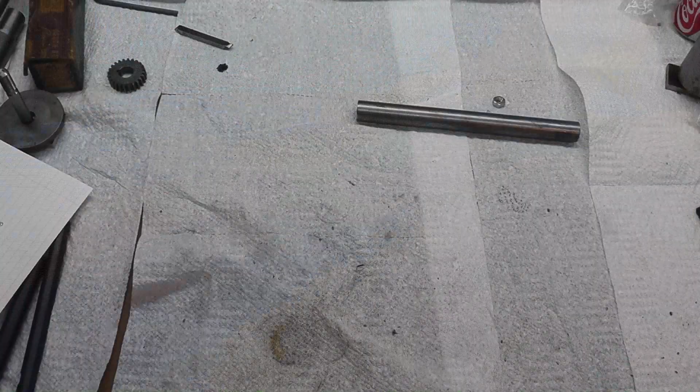Now that we got outside all cleaned up, we can get on to our project. Our project is going to be a tailstock tap and die holder, and this video is going to concentrate on just machining this Morse taper.

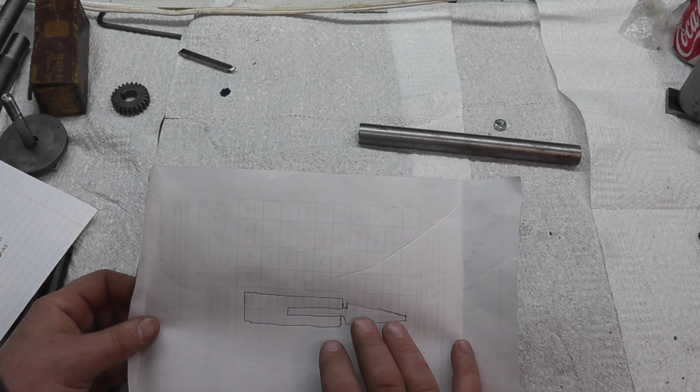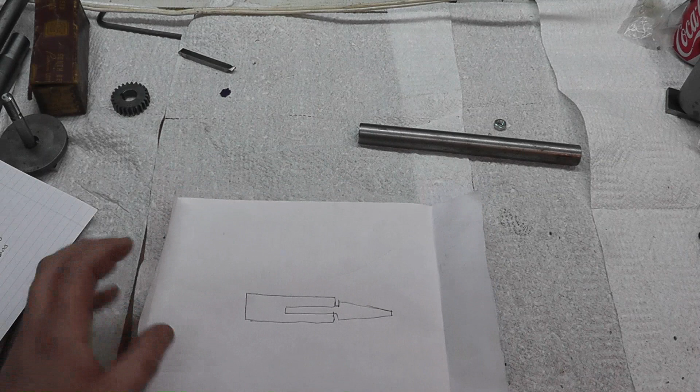I wanted to do a Morse tapered shank on the holder because, one, it's more fun to machine rather than doing just a straight shank, and two, if you have this in your tailstock, I'm going to make this comfortable enough to hold with your hand. I didn't want to have this huge piece of metal sticking out, and then also your drill chuck, and just have this huge long contraption.

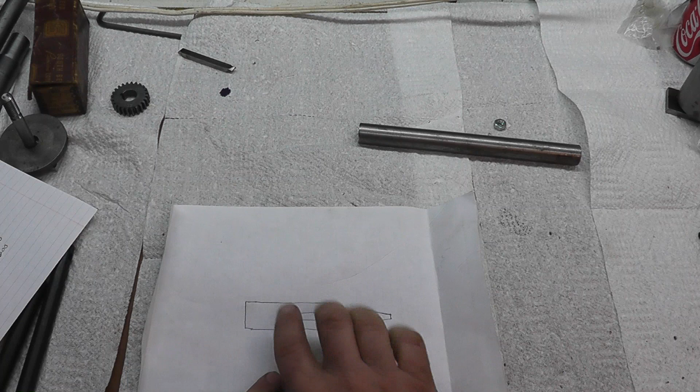The basic premise is the Morse taper is going to be in your tailstock. You'll have a rod, which I haven't figured out the length yet, and then you'll have a body. The body sits on the rod and will be allowed to spin. Up front you'll have a device to hold the dies, and also I'm going to incorporate some sort of tap holder to it too, which I haven't figured out yet.

You'll grab it with your hand as the lathe is running at a slow speed, and you'll be able to, with hand pressure, stop this shaft from turning, and it'll tap and feed itself. And then when you hear or feel it hit the shoulder, you can let go and it'll spin on the shaft without feeding itself in.

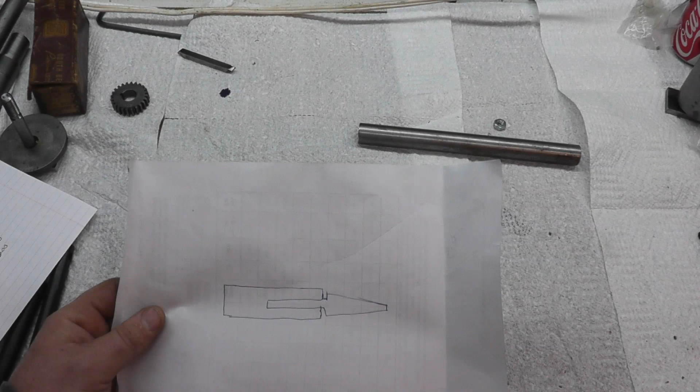For the heavier cuts, I'm going to put a bar that you'll be able to hold too, or rest against the ways. Those are in upcoming videos, but basically we're going to concentrate on this Morse taper, so that way people that don't want to build the whole project can see how to do the Morse taper with the tailstock offset.

By all means, if you have a taper attachment, use it. If your compound is long enough to accommodate a Morse taper, use your compound. It's a lot easier, but my compound does not have enough travel to be able to cut the Morse taper.

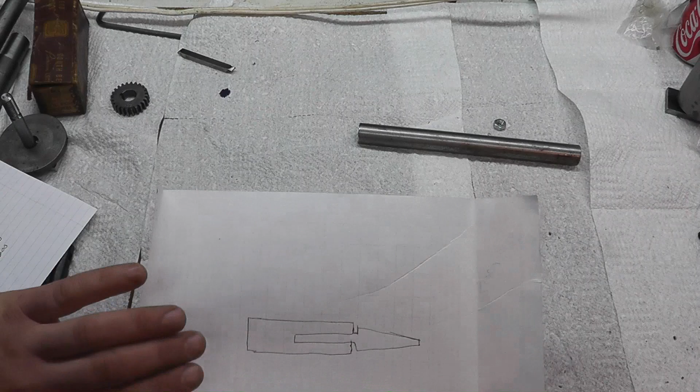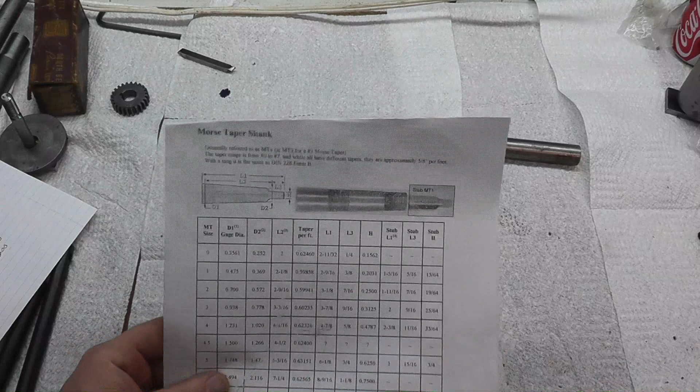The Morse taper, the actual tapered part that fits into the tailstock itself, is, mine's a number 2, 2-9/16 right there. These charts you can get on the internet. It gives you basically the large diameter on this end and the small diameter on this end.

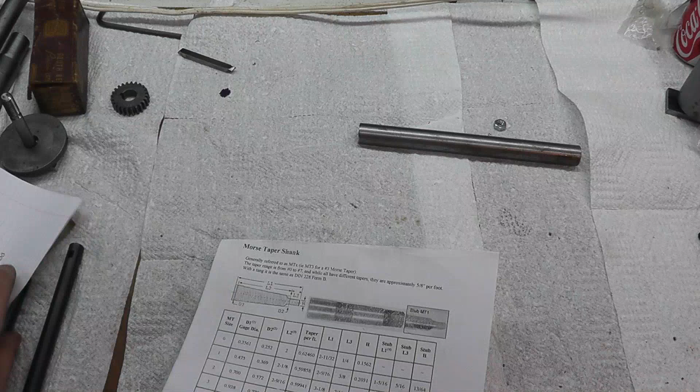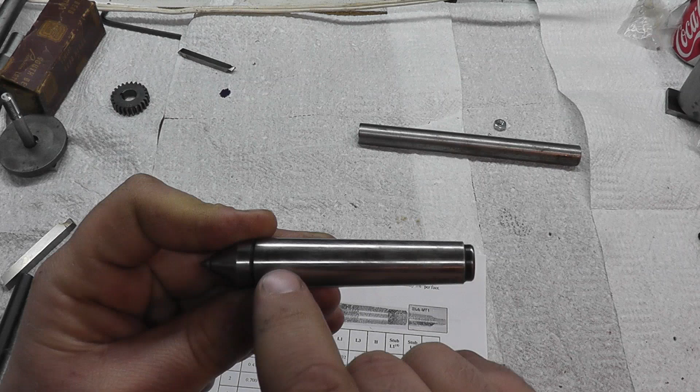This taper is longer than 2 and 9/16. The reason for that is you have to have the point sticking out, so basically the only part that sits into the tapered quill is up to about here. Now if you measure right where the quill ends and this end, you'll get your 700 thousandths here and your 572 thousandths here. These are standards - all Morse tapers are, depending on size obviously, but all Morse tapers are standard.

We're obviously going to be machining this between centers, so we're going to have to figure out how much we want to offset our tailstock.

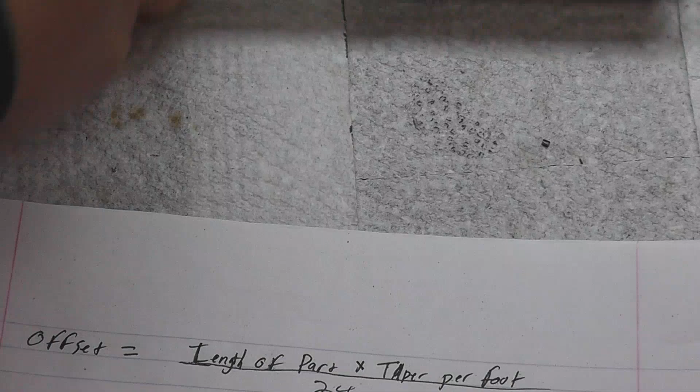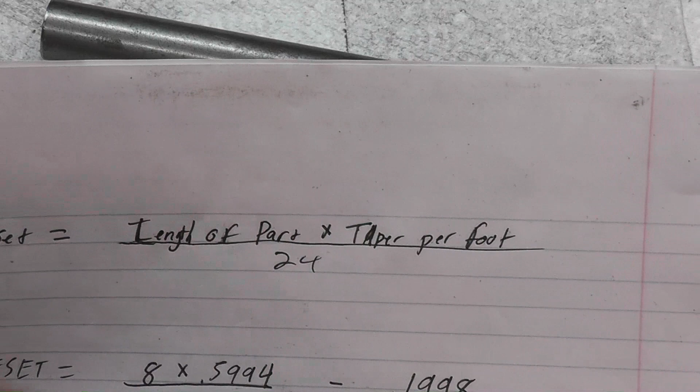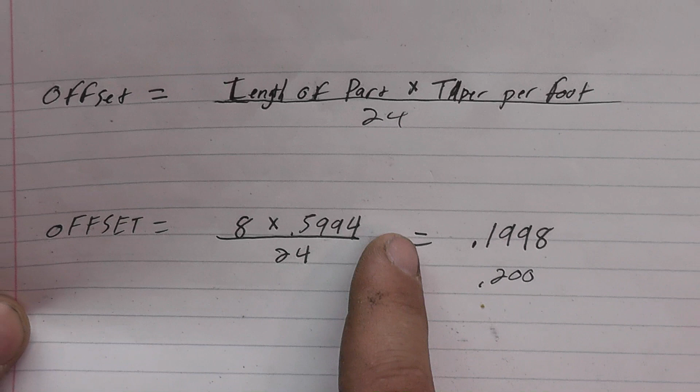Now we do have a formula for our tailstock offset, because I know you guys love formulas so much. Your amount of tailstock offset is equal to the length of the part - not the length of taper, the actual length of the piece you're cutting, which in my case is 8 inches long - multiplied by your taper per foot, which you can find in your chart, divided by 24. So our amount of offset equals 8 times 0.5994, which is our taper per foot, divided by 24, equals 0.1998, which is pretty close to 200 thousandths, so we're going to call it that.

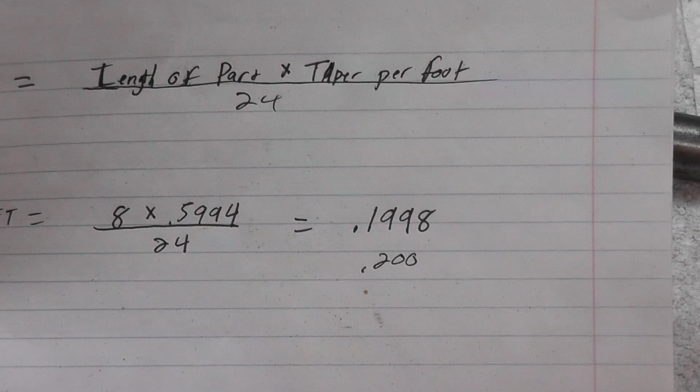Now, I do have enough travel in the tailstock to offset 200 thousandths. Now, here's the thing.

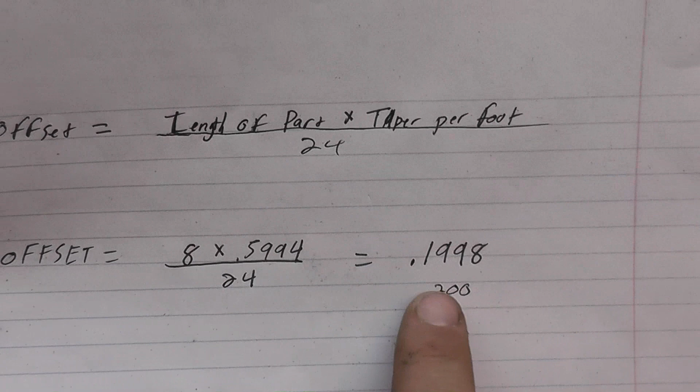You would think that the longer the part, the smaller the tailstock offset. But that's not true. It's actually the smaller the part, the smaller your tailstock offset.

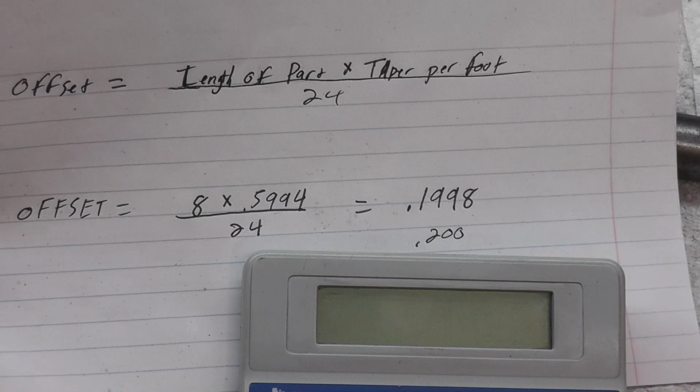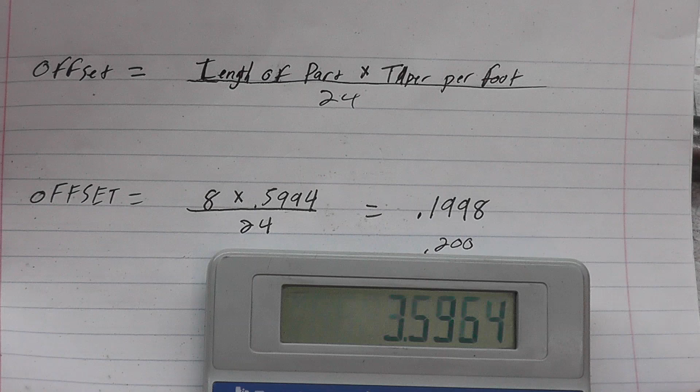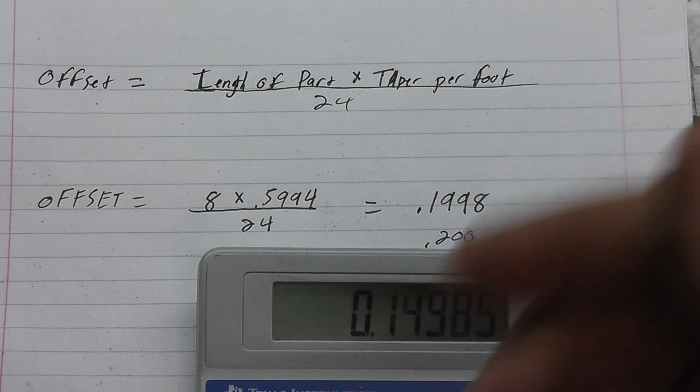So let's, just for S and G's here, put in 6. We have a 6-inch piece times 0.5994 divided by 24. We would only have to offset our tailstock 150 thousandths with a 6-inch piece. So you can kind of see how that works and measure your piece out by the amount that you're able to offset your tailstock.

I'm using 8 inches because I'm going to be able to do the taper and then have that shank rod all in one piece. Also, this is a piece of 3/4 inch that is center drilled and faced on both ends, because our large diameter on our Morse 2 taper is 700 thousandths, so that'll give us plenty of meat to go.

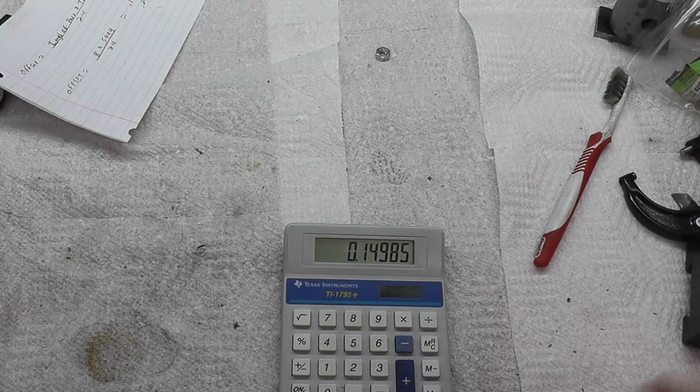Now, as far as running on centers goes, you've seen in my other videos you've seen me do it, but I just want to show you a quick thing.

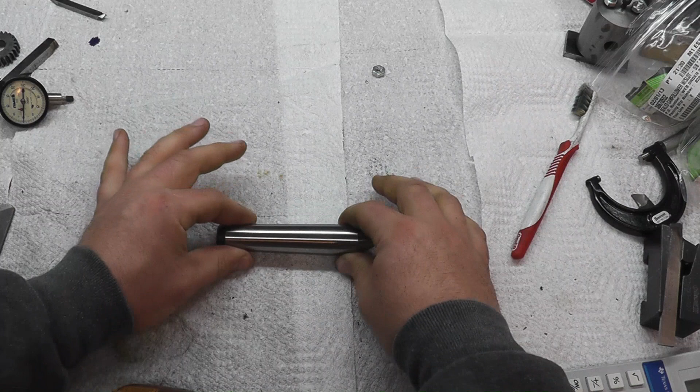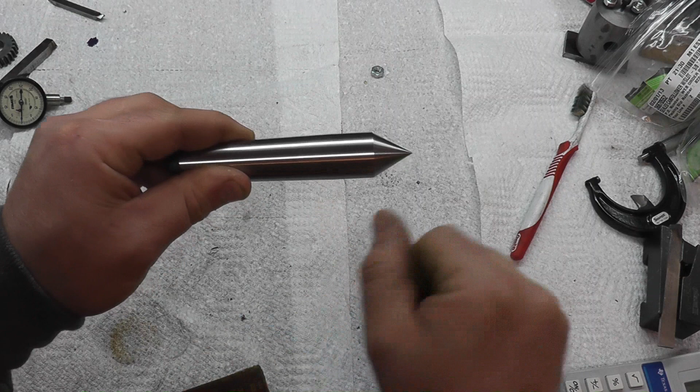This is your Morse 3 dead center that'll go on your headstock. And you've seen in my other videos, you can actually see a little line right here. Probably doesn't show up on camera, but that's where the spindle taper ends. This much of this sticks out of the spindle.

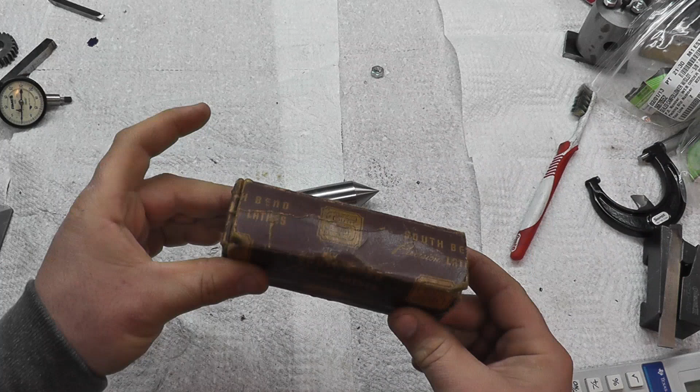Now here is, and it's actually an original South Bend part, very old. As you see, it's in metal clad boxes, metal edges. But here is a Morse Taper 3 spindle sleeve with a Morse 2 dead center inside of it.

Now I'm assuming this looks like 2 pieces, but I tried pressing this out and I can't get it out, so I don't know how pressed that is in there, if it's bonded or whatever, but either way, you can see the size difference. So you gain about a 1/2 inch or so on your length towards your headstock, which will give you more of a positive engagement for your lathe dog. Just something to be aware of.

So let me go over to the lathe and we're going to set up our tailstock offset, and we're going to use that test bar that I've machined a few videos back. If you need to know how to make one of these, it's very, very simple. I do have a video of it, but it's basically face both ends, center drill both ends, run it between centers, and true up one end of it.

That's the basic idea of it. So let me put this in the lathe and get a dial indicator set up on it so we can offset.

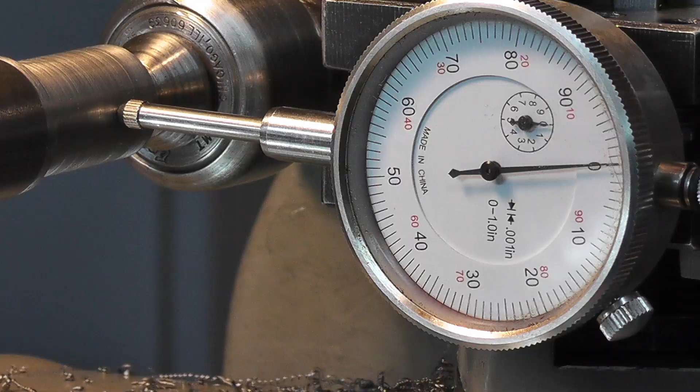Okay, I have my test bar mounted between centers. Now before I did this, I went and used this test bar and that twin collar one that I made to make sure that my tailstock was in alignment, and so we got that all set.

I did have to add, to get the, I have enough room for the 200 thousandths, but the little set screw on the base of the tailstock was too short to give me the 200 thousandths, so I had to put in a longer one.

So I want to offset this 200 thousandths. Now it doesn't matter the length of your bar. 200 thousandths offset is 200 thousandths offset, whether it's 12 inches away or 6 inches away. The only reason why that comes into play is because the amount of angle that you have when you're closer or farther away.

So I loosened up the other side, the other set screw on the other side, and we're going to pull this tailstock towards us to make the end of the bar smaller, and towards the headstock is going to be the larger side of our taper.

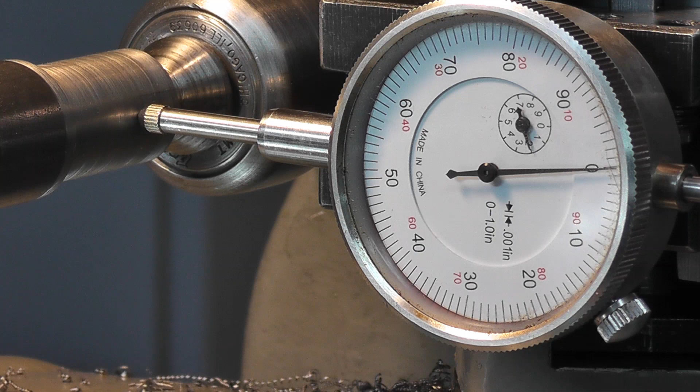Make sure it doesn't pull that tailstock any. Let me set up the bar between centers and get you a better angle.

Alright, I got you the best overhead view I can get so you can see the taper being cut really well. I'm going to be turning at a relatively slow speed because I have the drive dog hanging out here, which is going to cause an imbalance. I just don't want a lot of vibration in the part. Let's get going on cutting this. The one thing you want to make sure of is that you have enough clearance on your tool to your part, because your part is tilted towards you, so you want to make sure you're actually cutting and not rubbing, so just adjust your tool post accordingly.

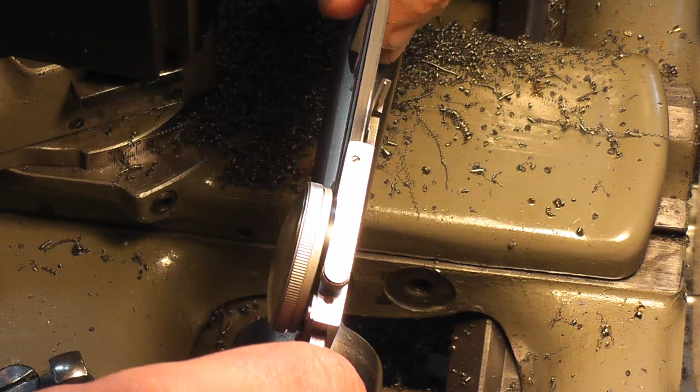I know the camera probably can't pick up on that, but this mark right here is where I want my 700 thousandths diameter. This isn't going to be extremely accurate because I'm just using the dial calipers. Let me get in here best I can. It's about 5 thousandths off, and we want 572 at the end, the very end.

575. So I'm going to take another quick pass, take a couple of thousandths off. And then that should be it. Then the rest of the fit I can kind of draw file out.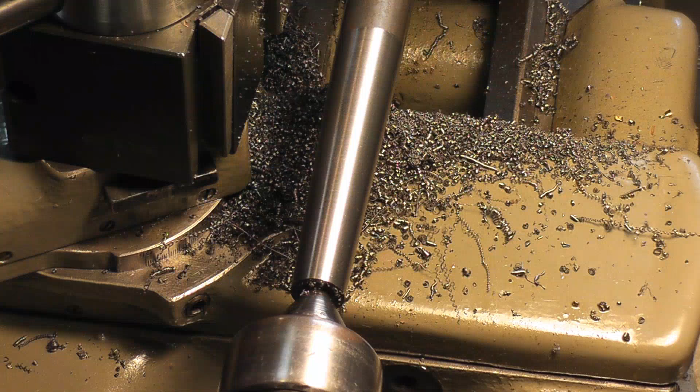Let me grab this. I'm just going to give this a quick polish, get rid of those tooling marks. Quick polish here.

Now what I want to do, or try to do, is take that one, hold them opposite of each other, and see if they equal on both sides here.

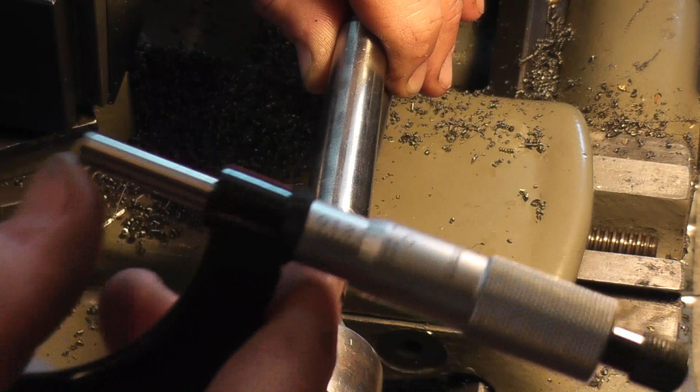I don't know if I can. Right here, I'm measuring. Let's see. On the bottom there, and then this. I don't know if you can tell, the camera will focus there. It says 322 thousandths, but, or 1 inch 322.

I'm sorry. Yeah, 1 inch 322. And right there, we're at 23. So we're within a thousandth of whatever this is there.

Now, what I want to do is let me take the camera down. I'm going to blue this, and we're going to check it against our actual, before I do that, what we're going to do is just take the very end, touch off. I'm going to take about 25 thousandths, and we're just going to cut a relief at the very, very end. Maybe just a little bit more. Take another 20.

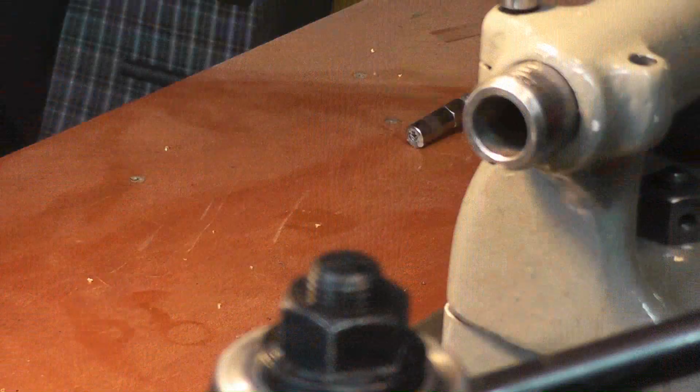Alright, now let me get a better angle for you, and we're going to test our taper. Alright, time to test fit our taper. Now, I still have it in the lathe dog in case we got to put it back in. I have bluing on it.

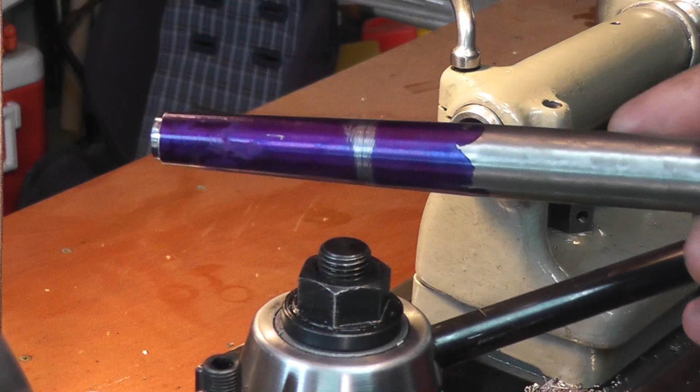So crank out the tailstock a little bit. Seat it. Give it a quick little twist. Back it off and see if it self-ejects. Which it barely does. Alright, you can see right here, we're hitting hard right at the top. It means I have to take a little bit more off to be able to get this whole thing to seat.

So we're so close that what I'm going to do is just hand draw file it until I get this to seat perfectly. I'll take a little bit here and then retry it again, and then just keep going back and forth. So rather than put you through all that, I'll show you the last couple of steps and what we end up with.

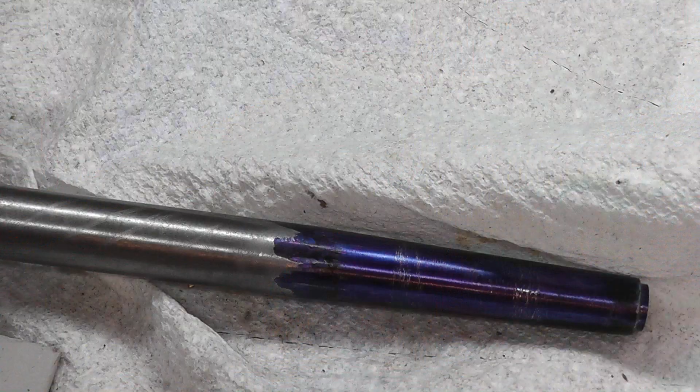Alright, after some filing and back and forth, we got ourselves a nice fit. I don't know if you can see here, but we're hitting here, we got some hits here, we're hitting here, and spots in between, all along here. Basically we have one ring from here to here, one ring on the very tip, that's about a quarter of an inch wide, and then you got a little line here and some hit here.

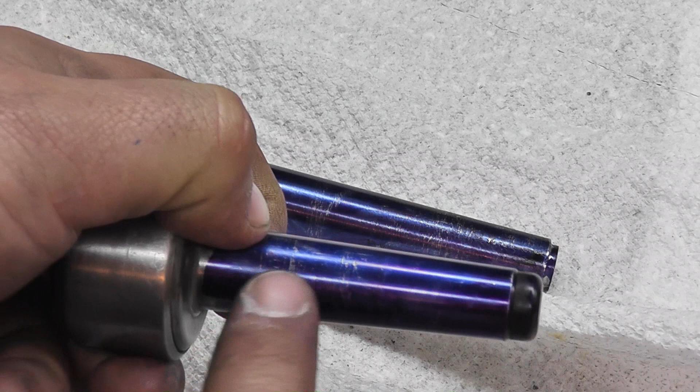Now I just compared that to the live center, and you can see that we're hitting hard around the edge. We're hitting right here and here, so it's actually better than the center I've been using. So, let me just swing over to the lathe itself.

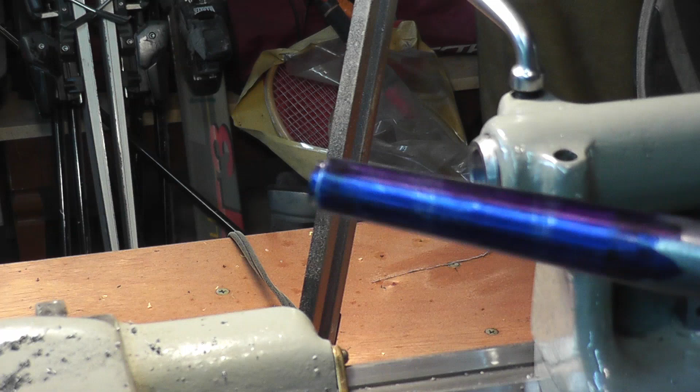When you put it in and seat it, it does not rotate, and it will self-eject. So that's pretty much going to be the basis for our part, and I'm going to turn the rest of this down to the diameter that we need.

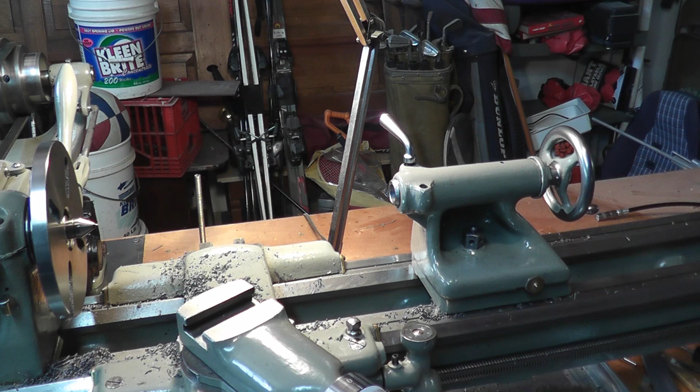So right now, let me get this tailstock back in line to where we need it. Now we want to get our tailstock back to center line, so my dial indicator here is touching up against the turned side of that test bar. I'm going to crank in.

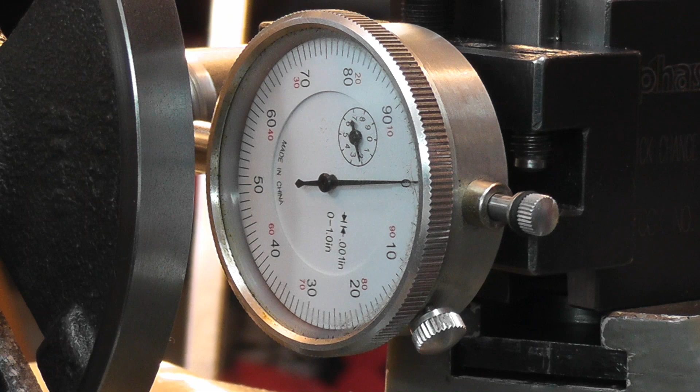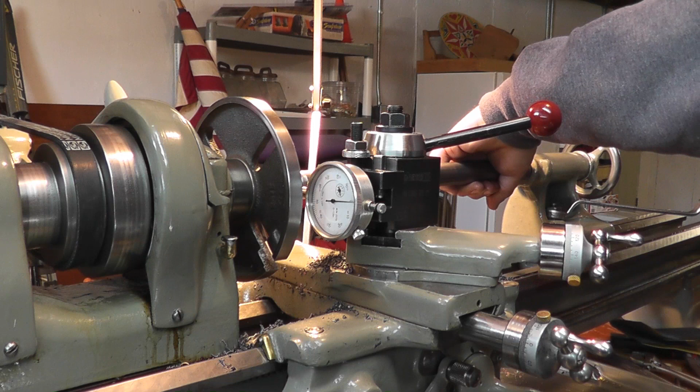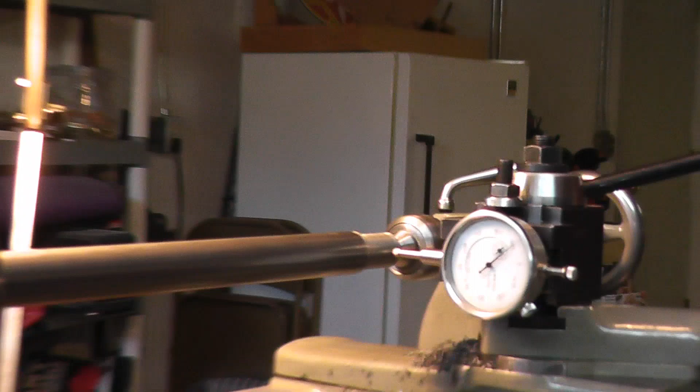There's 0, 100 thousandths, 200 thousandths. So we're going to bring our bar out of here, crank our carriage down to the other side. A little bit further, just to get the carriage all the way down, to the same spot on that bar, or same distance away from the center. Now we move our tailstock away from us 200 thousandths.

Is 100. And there's 200. Now we're going to double check that, but I want to put a little bit more of a sensitive indicator in there. So let me just change that out real quick.

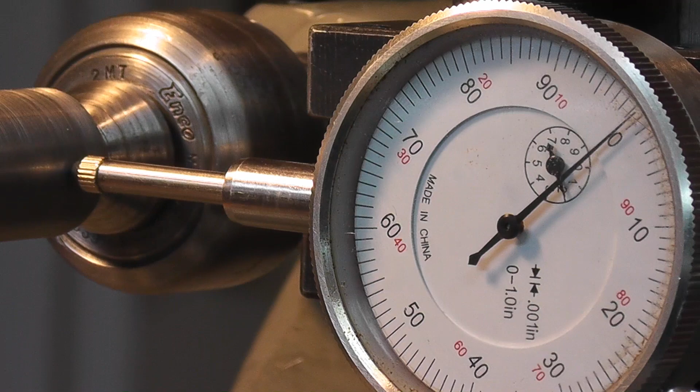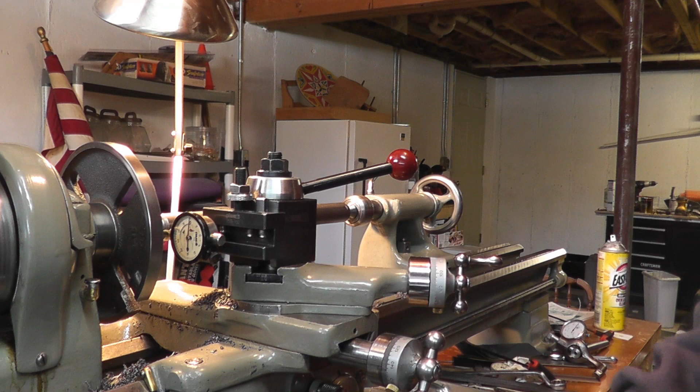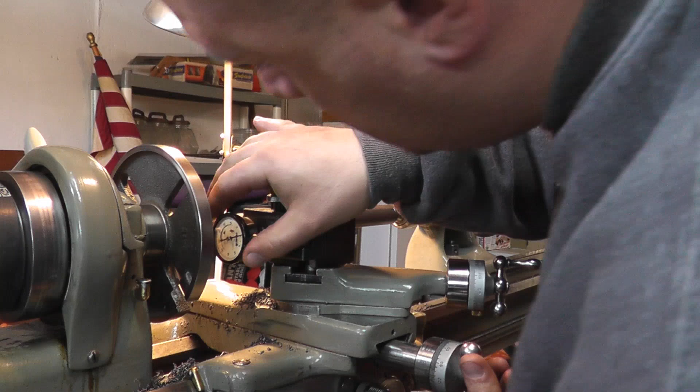I have my more sensitive indicator on here, and I have my bar back in place. Whenever you do this, just make sure you lock the quill down, because that'll tend to skew your readings a little bit. So we're going to bring this in here, and I know you probably can't see it, so I'm going to try to zoom into it, but I'm just going to load it about 5 or 10 thousandths or so, zero the indicator, then without moving the compound, crank down to the other side.

Tighten up. Now you can see that I'm off, and I have to go away from me about 5 thousandths. The reason why is because the second time I did that indicator, when I had the bigger one in there, I didn't lock down the quill, and that's why I'm off.

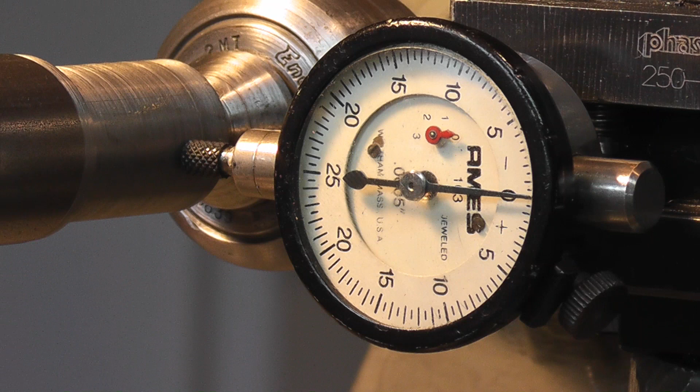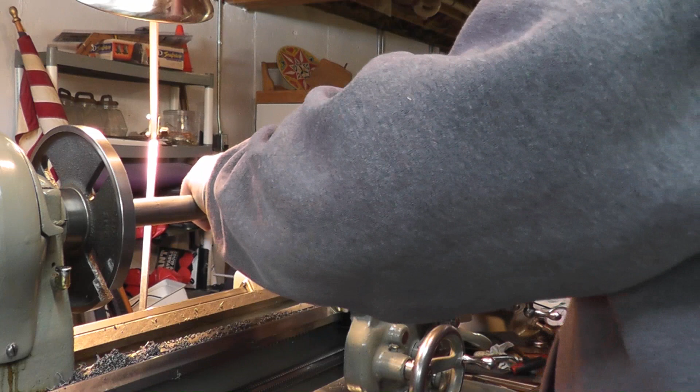So if I bring this in, until we hit 0. Snug up this side, make sure that doesn't bump me off of 0. And now I can double check, tighten up my quill, and you might be able to see, zoom in right there, we're right on 0. So now we're back in line.

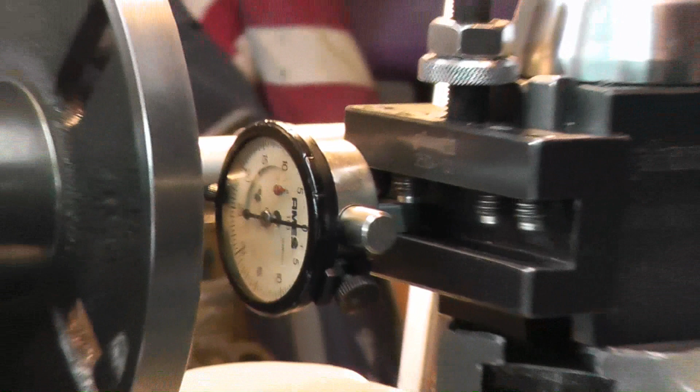I can do any other center turning that I need to do, or I can put this piece in a chuck and turn down that diameter that we need. So let me get to that. I'll set it up in a second and give you a better view.

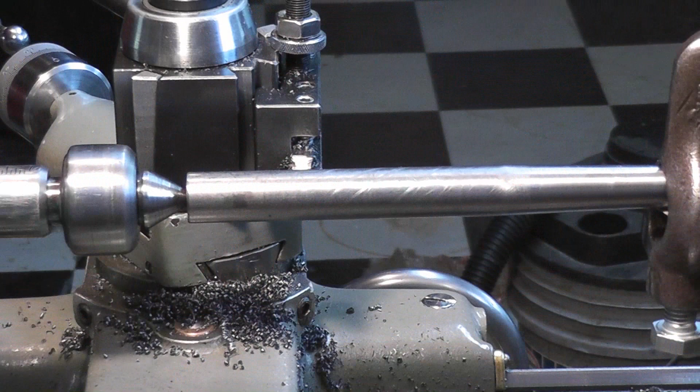Okay, right here is the beginning of my taper. So I want to turn this shank down to a half inch, because when I have the whole thing together, there's going to be a through hole of half an inch. That's going to be able to take, if you're threading a long piece, it'll be able to go into the shank of the holder. But anything over half an inch, I'm going to end up single pointing. So that's why I'm going to turn this down to half an inch, or just a shade under half an inch, because I'm going to ream out the body for half an inch.

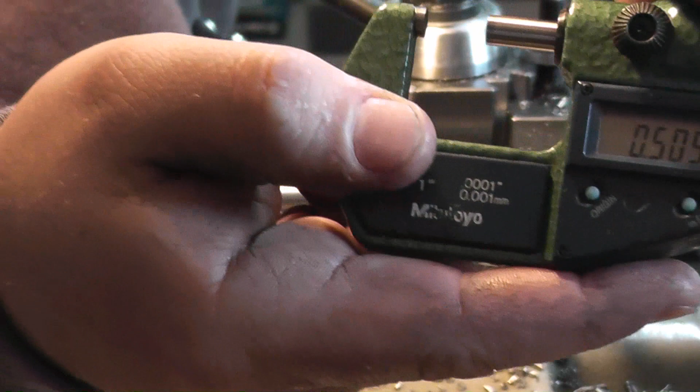Alright, just to show you, just by using that test bar: .5055. .5041. So, about 1.5 thousandths of taper in the shank just by using that little tailstock.

But that's not really going to mess with us too much. So, if we really wanted to, actually, we can pull this out a little bit more. So, actually, give me a second. Let me pull this out half a thousandth and see what happens.